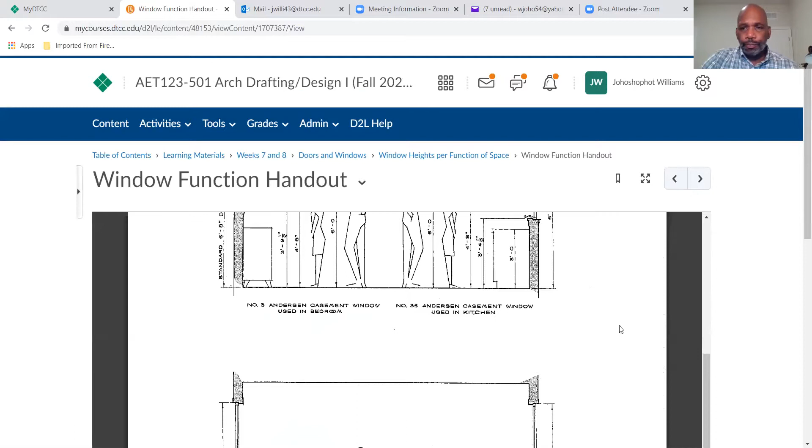So now what I want to do is, let's go down here, as we talk about windows, let's go here, window function handout. And let me just put this in presentation mode.

Now, when you look at the anatomy of a window in terms of parts, the top of the window is called the head, and the bottom is called the sill. Then you have sides, which are called jambs.

So typically in standard construction, the top of the window above the floor is a standard height of 6'8", which, as you see, is the door height. So most residential doors are 6'8" in height. So when you look at the location of a window against a door, the head height is typically the same.

But we know with today's standards, with higher ceilings and all that, that could be different. But from a standard point of view, the height of windows and the height of doors are typically the same, the head height being 6'8".

So now we see what changes relative to a window is the sill elevation, and that's relative to the function of the space. So for now, let's look here. This is a bedroom situation. The head height is going to be 6'8", but the sill height is going to be somewhere around 3'9", 3'10", because this is a bedroom situation, and you want more privacy, so you want that sill height to be elevated.

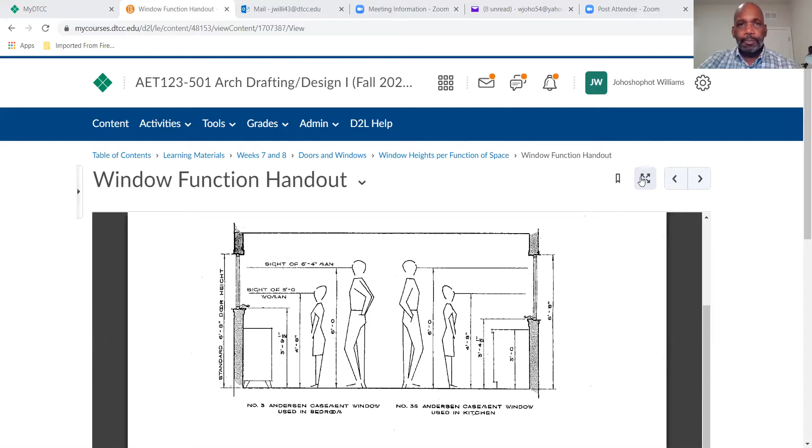So to get started, I asked you to print out the window and door schedule. Okay, I've printed it out here. This is my window schedule, and this is my door schedule.

We're going to start with the window schedule. If you don't remember how to get to that, I'll show you now. You'd be in doors and windows, and scroll down until you get to door and window schedules, which is a PDF. This is where you'd print the door and window schedule. Page 1 is the door schedule, page 2 is the window schedule.

Now we have to choose a window manufacturer. There are tons of window manufacturers, Pella, Andersen, Marvin, but we're going to choose Andersen Windows. So we're just going to go to the website. Let's search for Andersen Windows, and you see how it's spelled, A-N-D-E-R-S-E-N, right here, Andersen Windows.

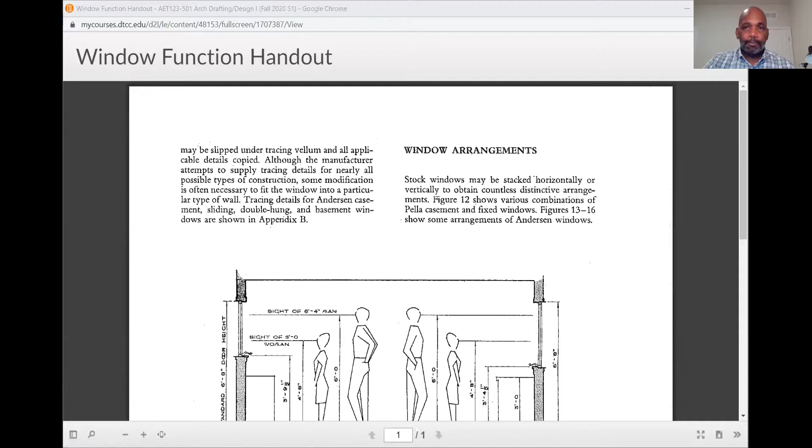I'm going to go back to windows. I'm going to choose casements. Now, like any manufacturer, they have tons of models and tons of finishes. Here we see Andersen's best-selling casement window, according to this information, is the 400 series. But there are other series you could choose from. For example purposes, I'm just going to choose the 400 series.

So I want to choose view details here, and then scroll all the way down until I get to the technical library. Then I want to view the documents within the library. Because I'm trying to size it, I want to choose the sizing documents. I can filter this by choosing document type, selecting a standard size chart, then filter it to the 400 series, and then filter it to casements.

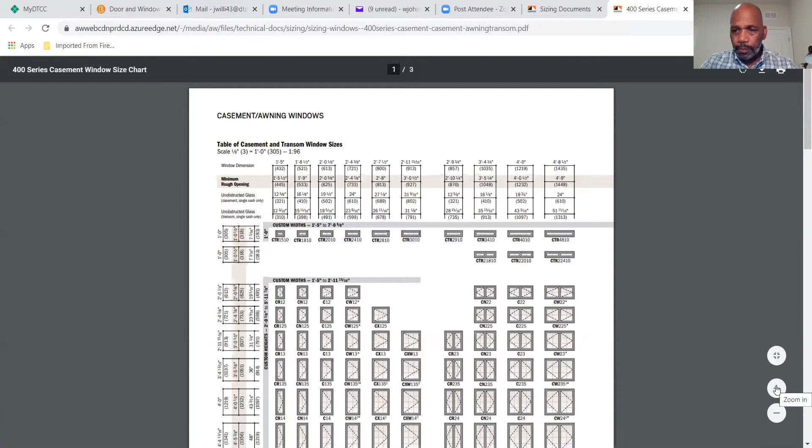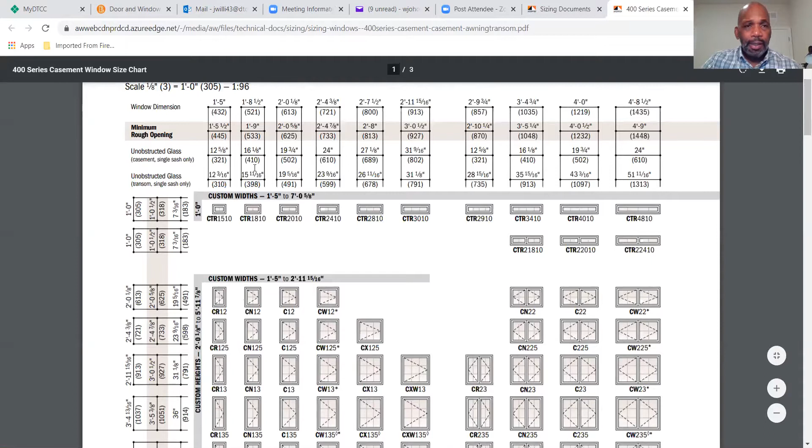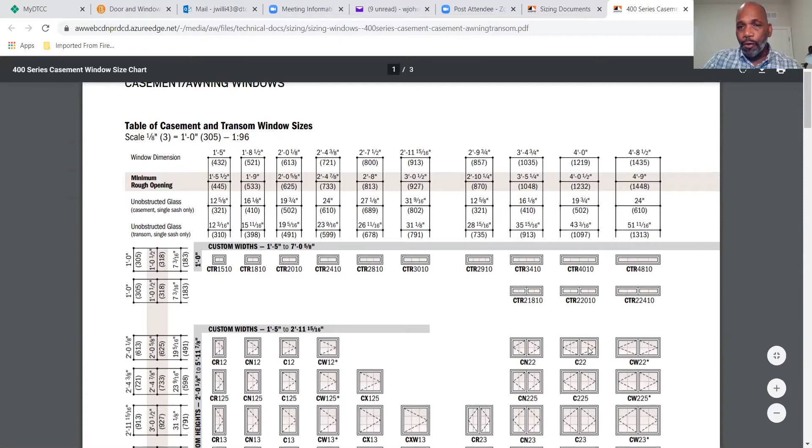Now, of course, a window has a width and it has a height. Okay, and these horizontal dimensions here are establishing the width, right, of the casement windows, okay? So we can see this casement window can start off at about 1'5" in width. And then it can increase up to 4'8" in width using 2 units, or 4 feet wide using 2 units, or 3'4" using 2 units.

And then 2'11" for single units, right? From 2'11" down to 1'5" for single units. Okay, but here's the issue. This is the width of the models, okay? And of course, this is the height, okay?

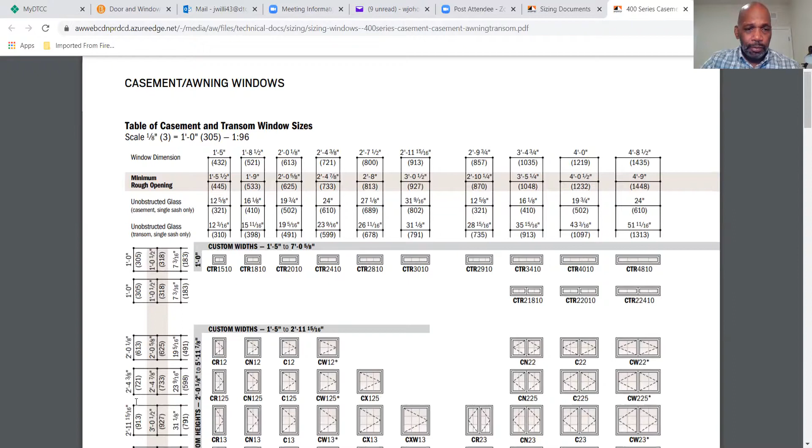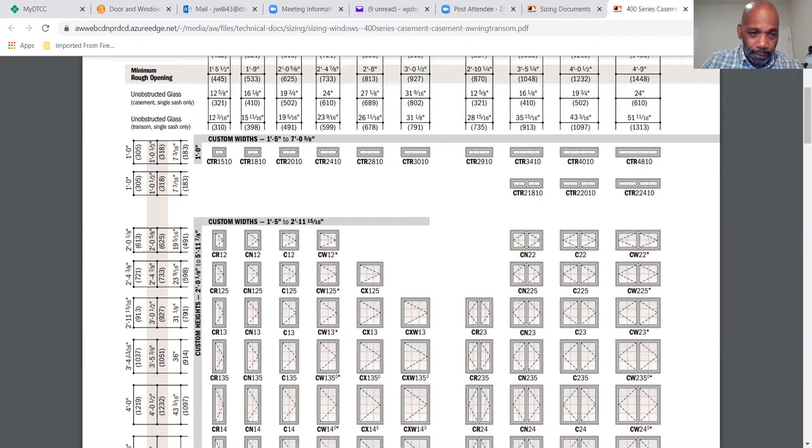So as we start looking at the heights, they start off at about 1 foot in height, and then 2 feet, 2'4", 2'11", 3'4". And this is the range that we need to be in, right? Because what we're specifying now is the window above the sink, and we know the head height is going to be 6'8", sill height is going to be 3'4". So the maximum height of our window over the sink needs to be 3'4". But as we continue, you can get a 4 foot high window, 4'4". It continues. All right. Good.

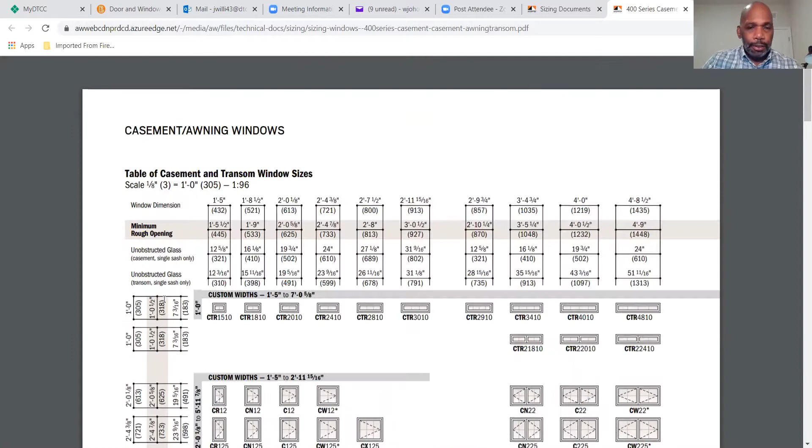So now let's look at these dimensions more specifically. In terms of width, this first row of dimensions is the actual width of the window itself. A window has a frame, and then within that frame is a sash. This window dimension is the actual width of the window from frame to frame. But then that window has to be installed in a rough framed wall, with studs. So they provide window openings in the rough framing to receive the window.

Now, typically the rough opening is larger than the actual unit size of the window. That makes sense, right? Because that opening has to be large enough for them to insert that window and get it plumb or straight. Particularly if it's operational, if it's not plumb or straight, it's not going to operate properly. So the rough opening of a window is always larger than the actual window unit itself, and we see that here. With this 1'5" width, that's the actual width of the unit, but the rough opening the carpenter is going to provide in the rough framed wall is going to be 1 foot 5.5 inches. So as we continue, we see unit dimension, rough opening, unit dimension, rough opening. Okay, good.

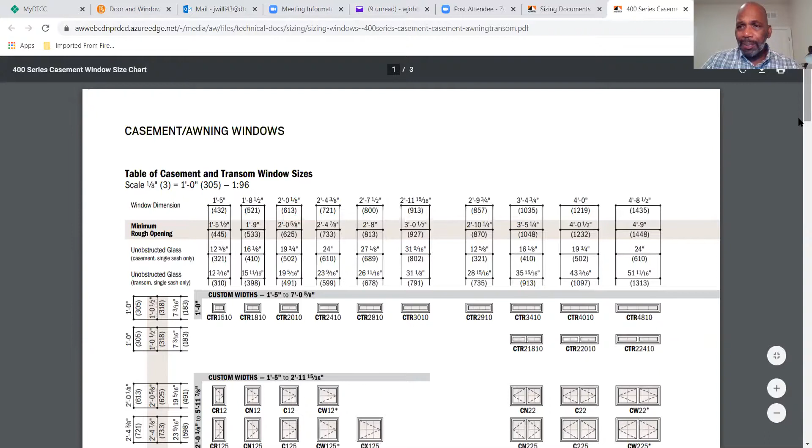The same thing applies to the height. This first dimension here is the actual height of the unit itself from frame to frame. And then the second dimension right here, that's the rough opening. So we see how the rough opening is larger than the unit itself, and that continues downward for the height of these windows. All right. So now we're going to use that information to help us out.

So now my first decision is that I need to decide how wide the window is going to be above the sink. I know that my sink base unit is 3 feet wide. And I don't necessarily have to make the width of my window the same width as the sink base cabinet. Some people like to do that, but that's not necessary. So here's what I'm going to do. I'm going to make my window width 4 feet. Okay, so I'm going to record that.

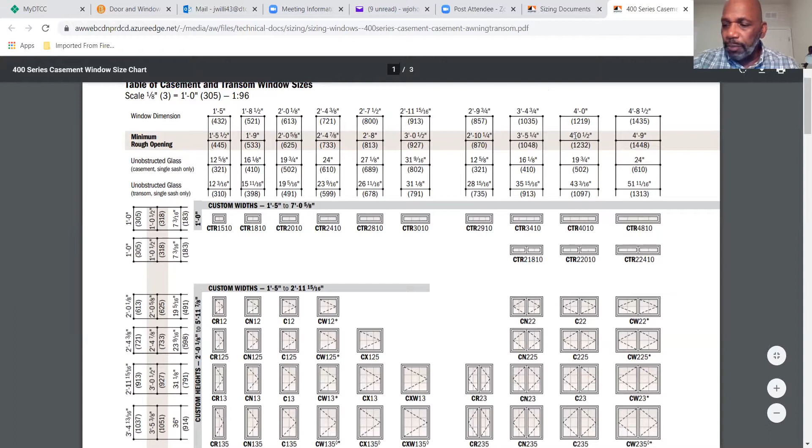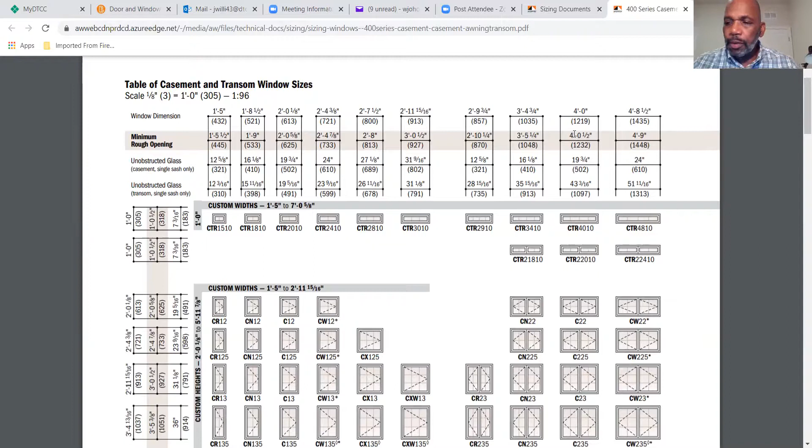So my unit width is going to be 4 feet, okay? But my rough opening width is going to be 4 feet 0.5 inches. So that's my width. And then I'm also going to choose my height now. I know that this window can't be any taller than 3'4". So I'm going to max it out here at 3'4".

Okay, so 3'4" is going to be my height. Let me just write that down. So my unit height is going to be 3'4", slightly over, and 13/16.

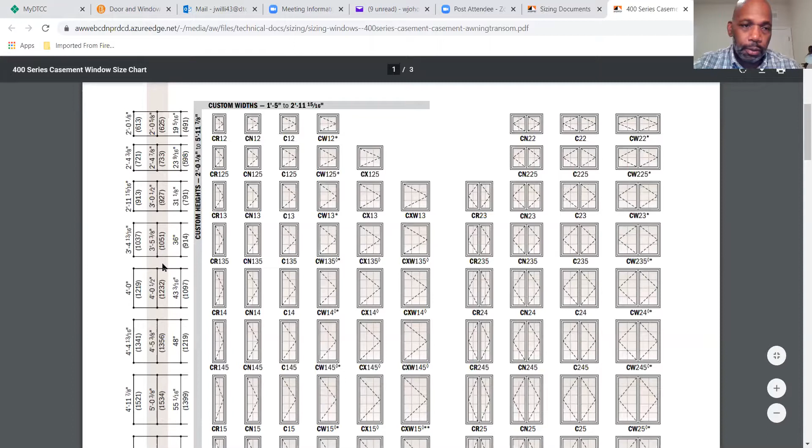Okay, but my rough opening, which let me point to, okay, here we go. Yep, this is my unit height, okay? But my rough opening height is 3'5" and 3/8, okay? So this is my unit. This is my rough opening, because I'm gonna need that information for my window schedule.

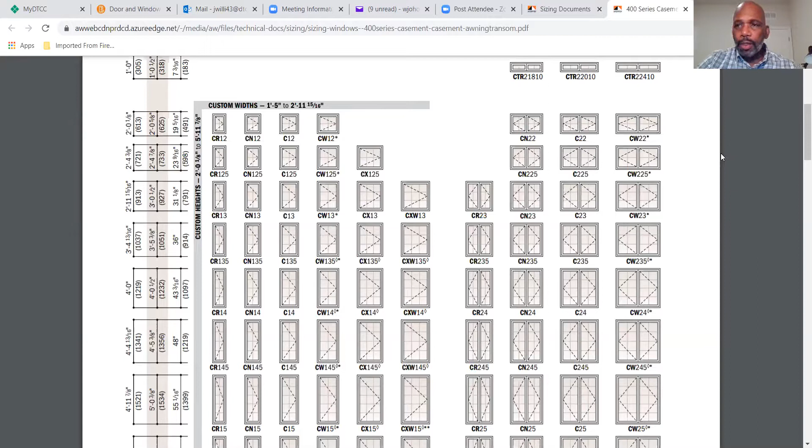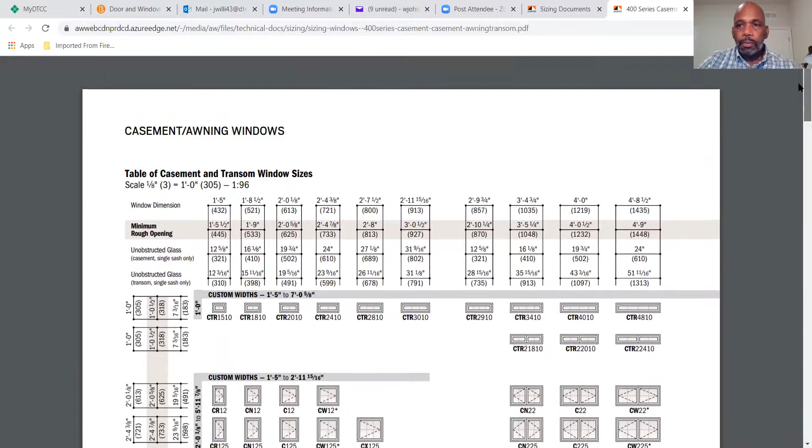So now when I come over here, let me see if I can just minimize this a little bit. There we go. All right. So now my width is 4 feet, and my height is 3'4". So where do the two meet? Here's my 3'4" coming over my height, and it's meeting my 4 feet right here.

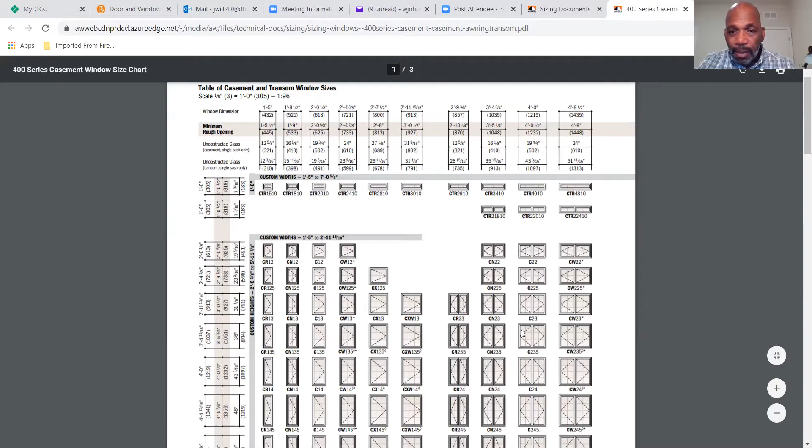So I'm going to record that manufacturer's number. I'm going to be using a manufacturer's number that's C235 right here. So it's going to be a double unit above my sink. I think it's going to be kind of cool. So again, this is my width, and where my width meets my height, that's the manufacturer's number. So now I have that information, and I can go to my window schedule.

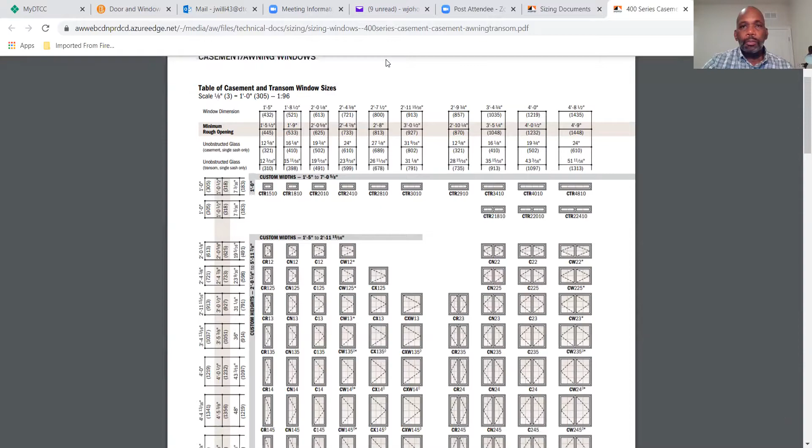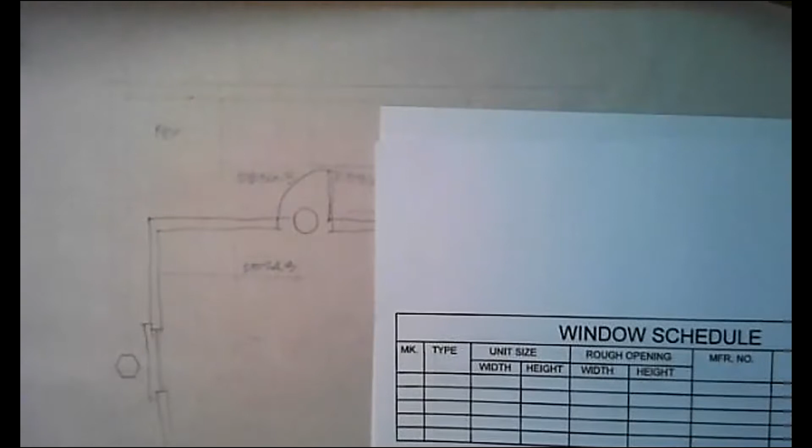Okay, so now I have the information that I need. I have my window schedule here. But I want to share this with you first. On a floor plan, windows and doors are marked or identified differently. This is a typical symbol used to mark a window, and this mark is going to be relative to the mark here in the window schedule.

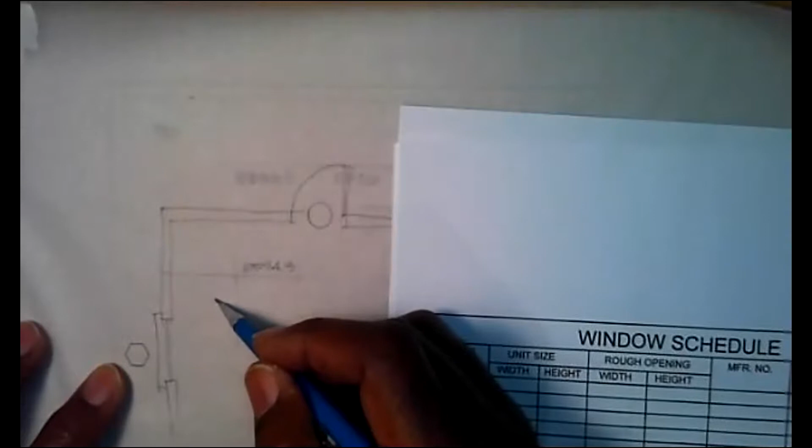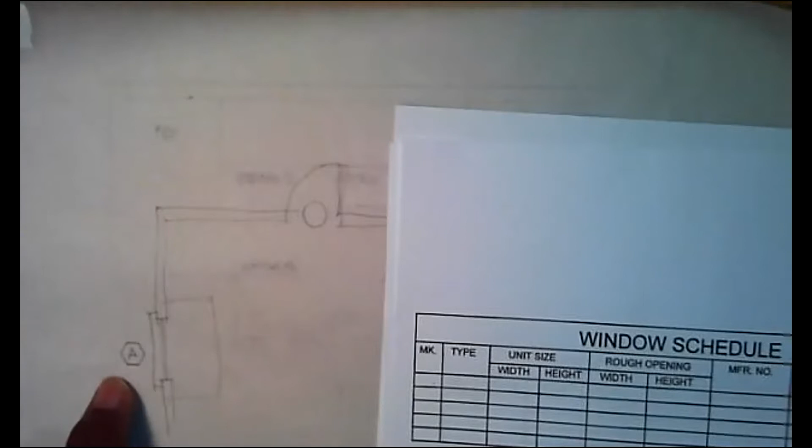But windows are marked alphabetically. So I'm going to say that this is the window above my sink right here, so I'm going to make that A. Good. Typically the window mark is on the outside of the exterior wall. Doors are marked numerically. So this would be door 1.

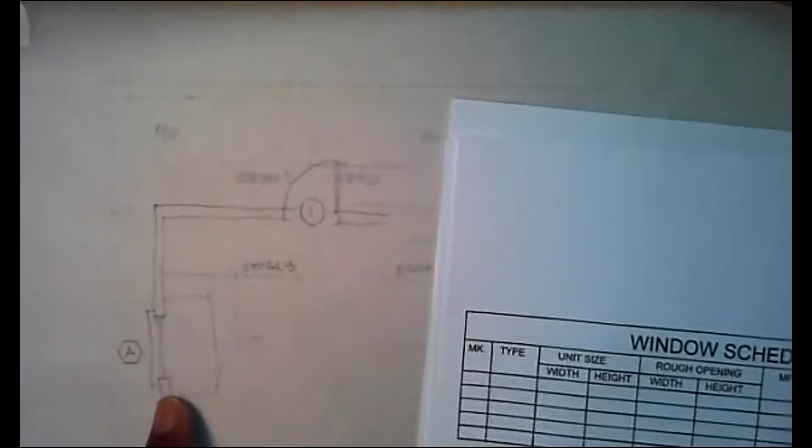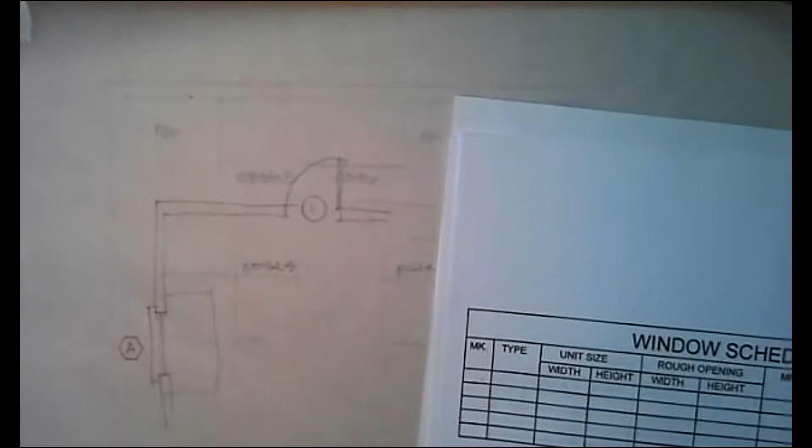Now, if I have another window, let's say over here, and that window is the same size and the same type as this window here, it would receive the same mark. So I would have an A here and an A here, because these two windows would be absolutely the same. I do not give each window a different mark. If the window is the same in every way, design, dimension, as another window, they get the same mark. The same thing goes for the doors.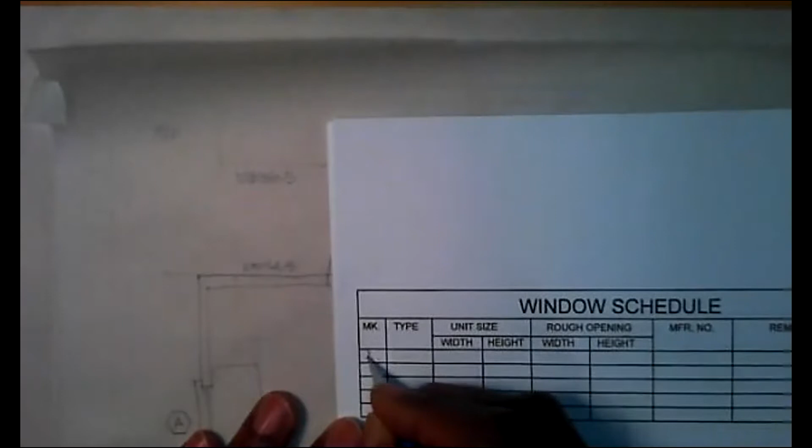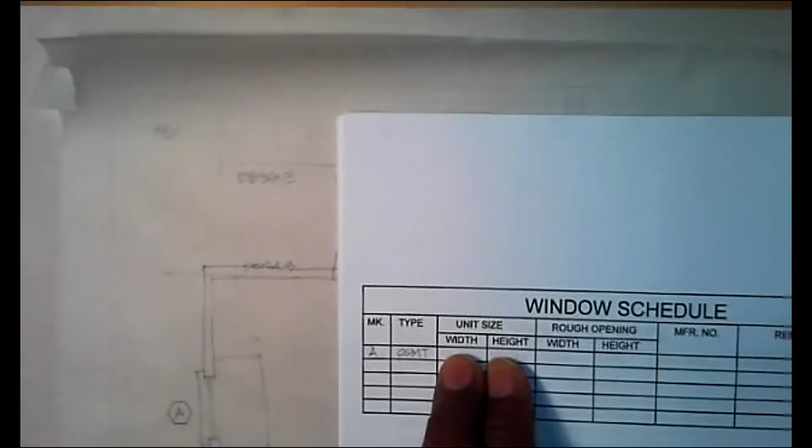So now, this is my window above my sink. That's A. So now I can come over here to my window schedule and mark this as A. Window A. Now my type is going to be casement, so I'm just going to abbreviate it. Casement. Now, we just looked at the sizing chart, and it gave us two dimensions: the unit size and the rough opening size in terms of width and height. So I can use that information that I wrote down, because I don't have dual screens.

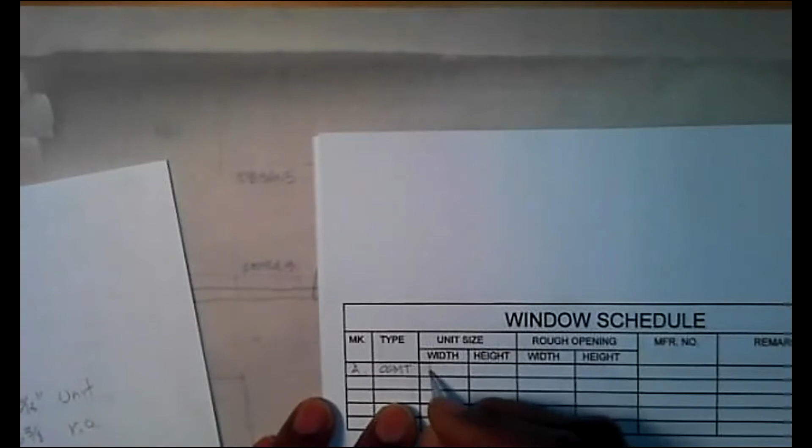So let's start with the unit width. The unit width for that window was actually 4 feet. Good. The unit height was 3 feet 4 and 13/16. Now, the rough opening width was 4 foot 0.5 inches. And then the rough opening height was 3'5" and 3/8 of an inch.

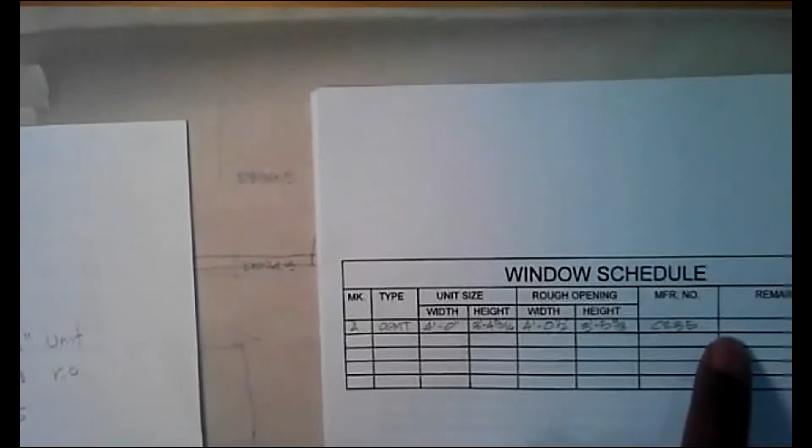And the manufacturer number where the width met the height was C235. And I don't have any remarks. If there was something special about this window, I could have some remarks here. So that's how you're going to start the window schedule.

So for your next window, if it's the same, it gets the same mark. If it's different, a different size or height or type, I would probably try to keep my types kind of pure. If I'm using casement, I'll use casements, but we'll talk about that a little later. So my next window would be a B if it was different, and then a C if it was different, and so forth. So that shows you how you're going to start to fill out the window schedule.